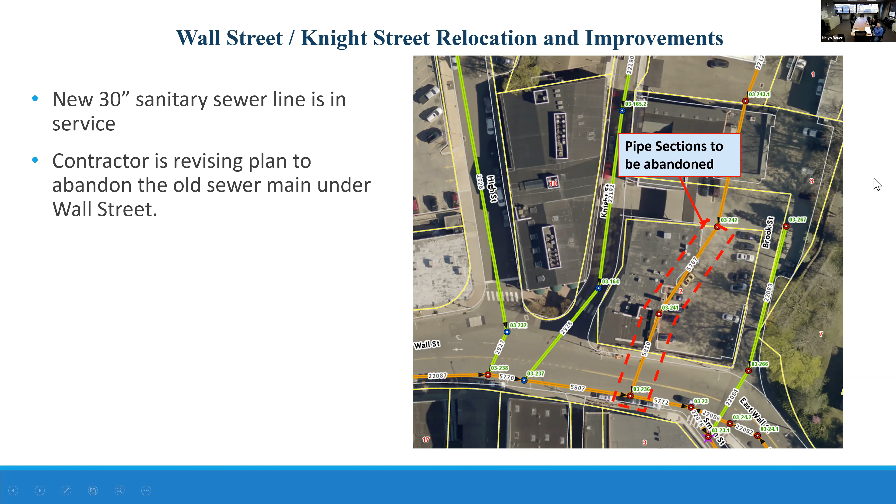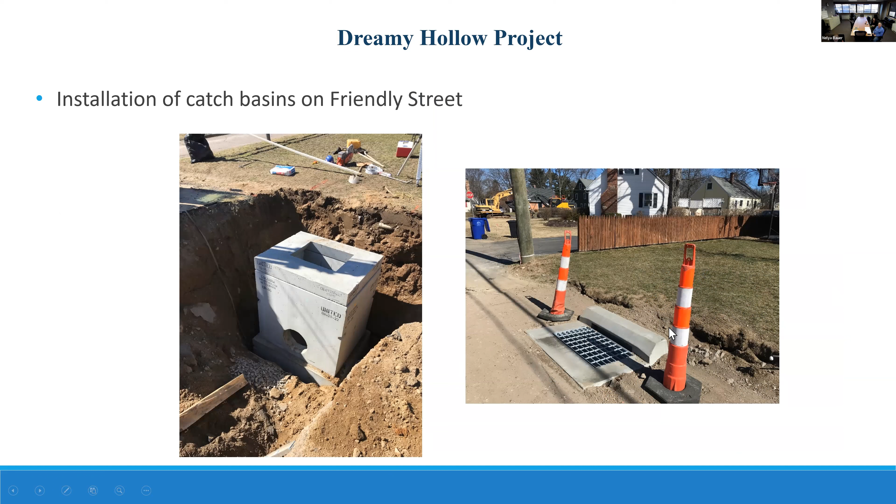On the Dreamy Hollow project, which involves the installation of drainage improvements, sanitary sewer improvements, and water main improvements in the Dreamy Hollow and Bettsbrook area, they're doing RCP box culvert installation and also the installation of catch basins. This shows the below-grade structure of the catch basin, and here you see the top of the newly installed catch basin.

We also have some updates on the pump station work currently in progress. On the Karen Drive pump station, we had a bypass pumping setup in order to pump out the wet well for cleaning and coating. We have the bypass pump shown here, pulling out of this manhole, which is a bit covered, and then it pumps through this bypass connection that uses the existing force main for the pump station.

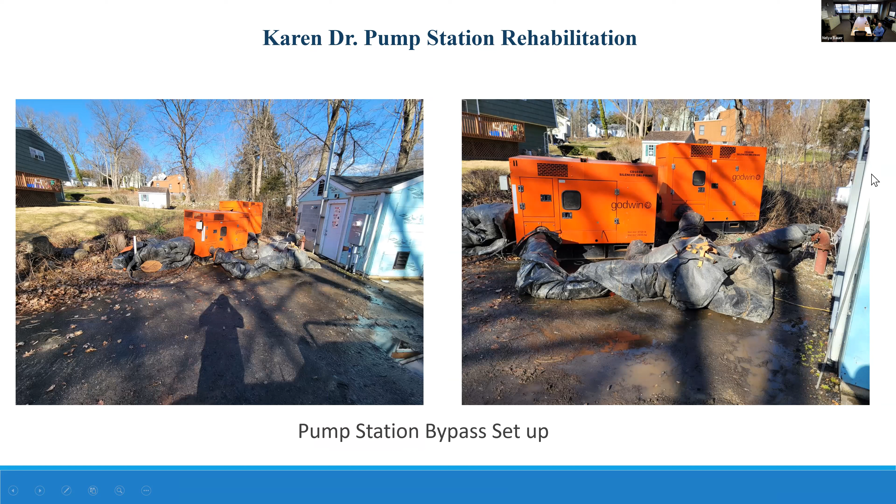Here we see the interior of that wet well. They're able to clean and sandblast the interior. They also noted there's an opening in the wet well that leads to a secondary area, no longer in service. It may have been used as an overflow at another point, but they're recommending to close off this area with a plate, since that secondary wet well area is not in use. This shows the interior of the wet well that has been coated, and also new floats have been installed.

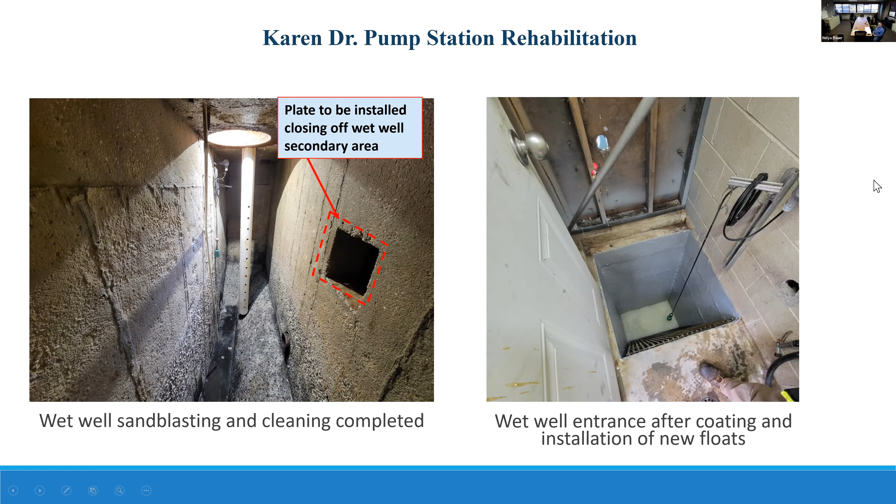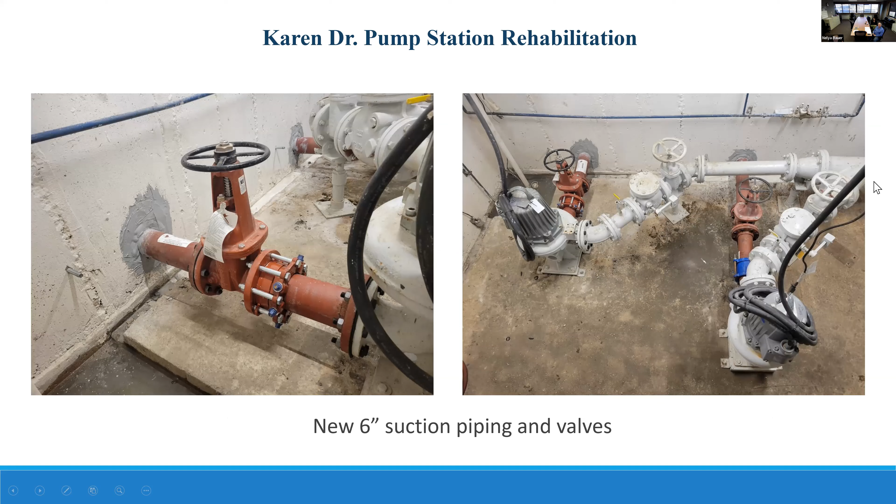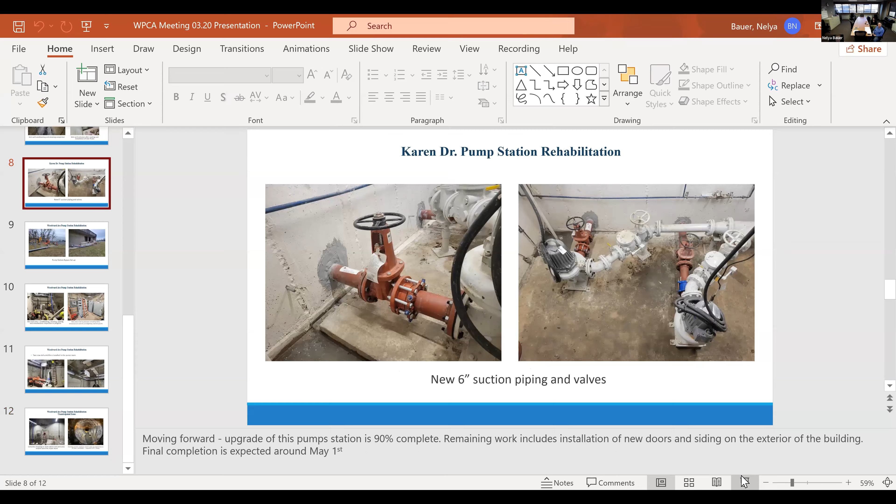They also installed new suction piping on the pumps that we can see here, and new valves. Going back to Karen Drive for a moment—sorry, having some technical difficulties—but I was just going to mention that the work at Karen Drive is largely completed. They're just doing some exterior work at the pump station, and they should be completed, potentially, by the end of April or May 1st.

This is the Woodward Avenue pump station. Here we have the bypass pumping setup, so they're able to pump out the wet well for cleaning. Here is the bypass pump, pulling from this manhole here, and then we have the bypass pumping, pumping through this bypass connection that uses the existing force main at the pump station.

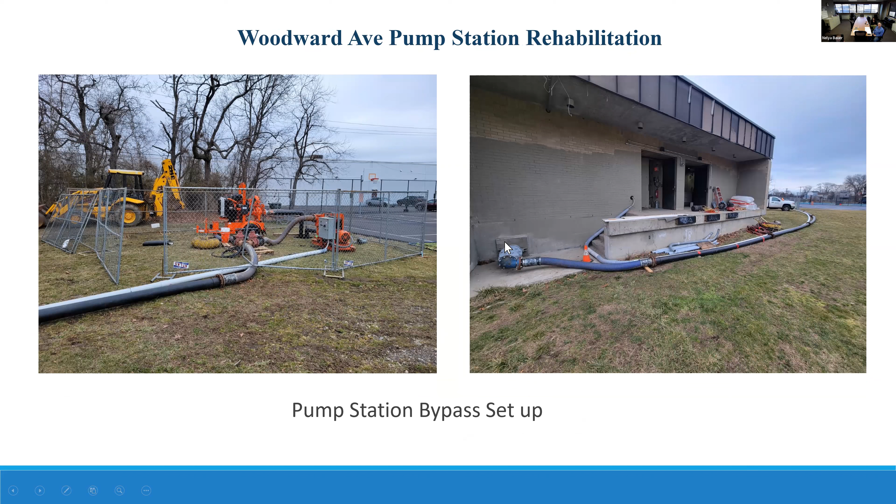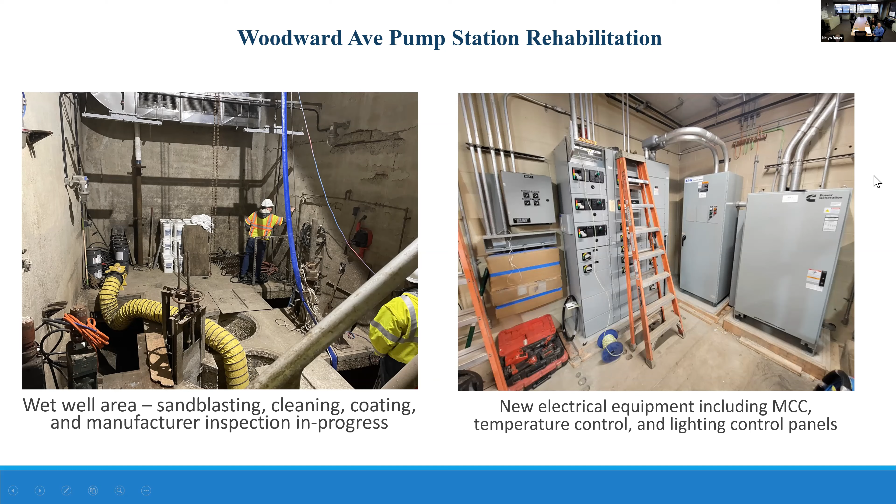They also installed 2 new dehumidifiers on the lower level of the pump room, shown here, for moisture control.

So the work at this pump station is likely to continue through April and May to finalize these items. Thank you.

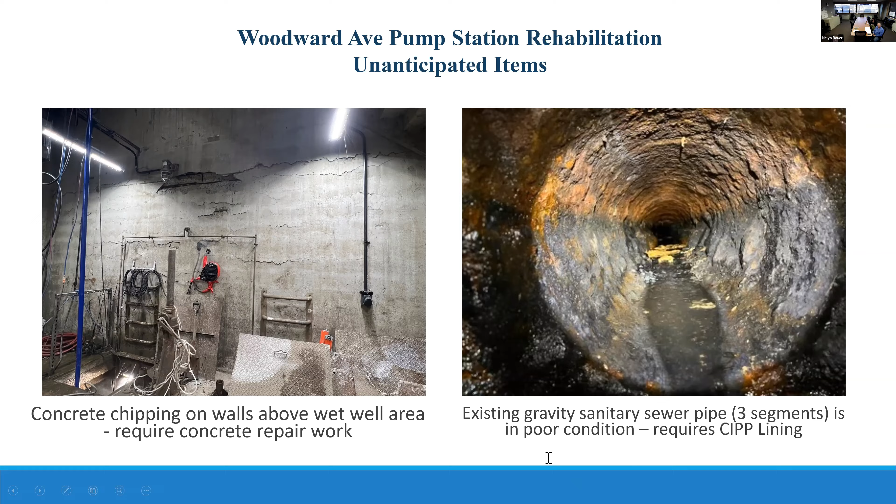Any questions on the construction projects? The only question—once, I don't have it, I'm driving. I looked at the pictures before, the pump station concrete failure. Did you consider coring that to see what was happening there? To see if it's more significant than just the face of the wall on the inside of the pump station, and not happening on the outside as well?

Wright Pierce, our consultant, Kovacs Construction, and the folks they're talking to have not recommended that. We can ask that question. They believe it's all surface impact due to hydrogen sulfide over the years getting into the concrete to the rebar. It looks like the rebar was installed too close to the edge of the concrete, so it's actually causing it to pop. The rebar is about 1.5 inches into the concrete. Ideally, you want at least 2 inches or more of concrete on the outside of the rebar.

But we will ask that. Roger, yeah, no, I knew that. I was just wondering if you had the same problem on the outside, you know what I mean? So you're not fixing the inside and then it's just going to happen again. Yep, that's all. Yep. No, we haven't—we'll talk to the team about it. But the approach is to get the experts in, knock off the concrete that's popping, and then reassess as well. That'll be part of the assessment.